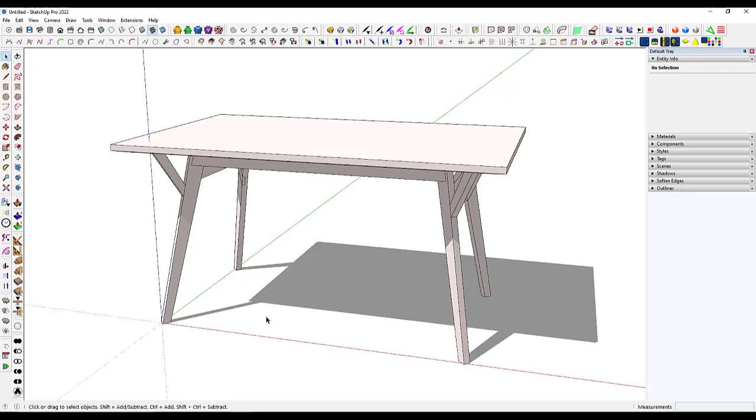The other day I was asked by a fellow woodworker on a woodworking forum about designing a table, something like this, with legs that are splayed and raked and angled knees. There were a few things I thought were interesting about the thought process of modeling this, so I thought I'd demonstrate.

Before we get into this, I want to point out I made a custom toolbar with the tape measure tool and the protractor. I'm going to use these tools sort of like you might use a pencil on a board. I put them out here instead of the ones on the far left, since I'll be in and out of those tools as I go, and you can see which tool I'm picking.

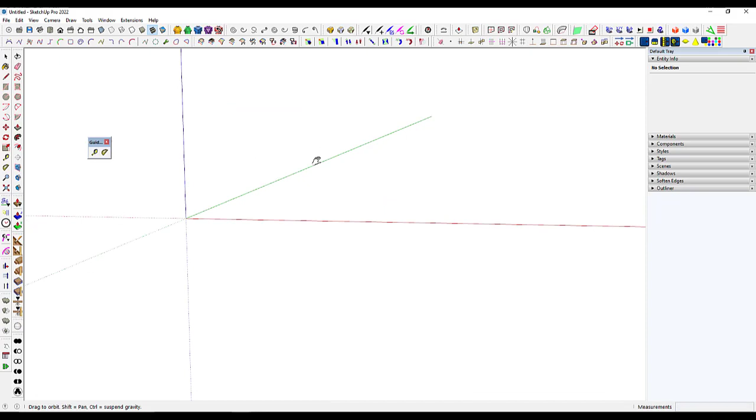The other thing I'm going to do is draw a rectangle, making it vertical. I'm just going to use this as my canvas to put my guidelines on, so I can keep them all in plane and it's a little easier to work that way.

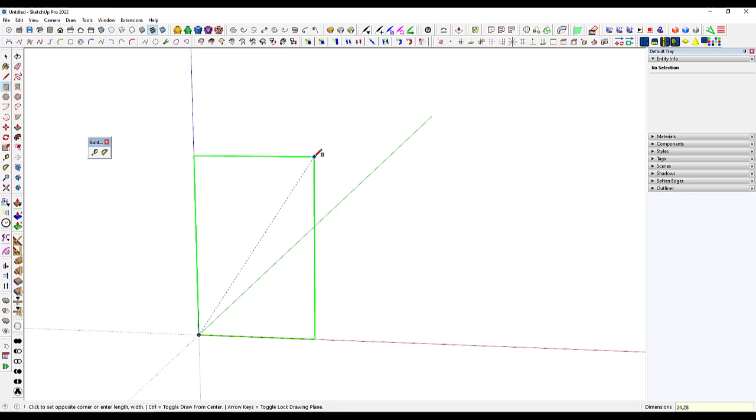I'm going to look at the dimensions. The narrow one comes first, so I'll make that 24 - the exact dimension isn't terribly important. The other one, I want the top of my leg to be at 28 inches off the floor, so I'll make that 28. Now I've got that rectangle.

I'm going to start. The reason I'm using guidelines and the protractor tool is these are not going to affect the geometry - they give me guides to work from and help me see what's going on, and then I can delete them when I'm finished.

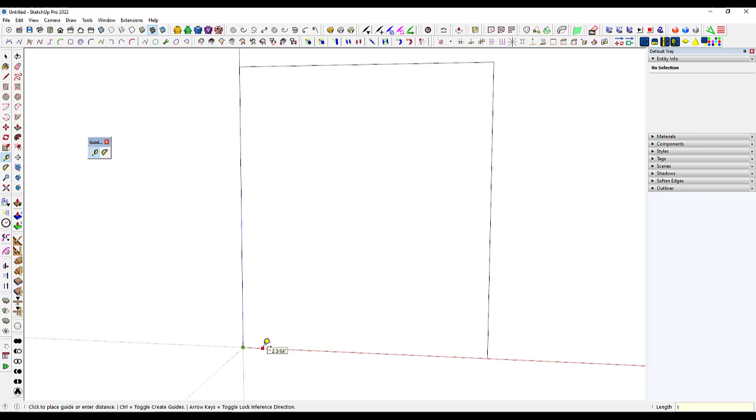So I'm going to start by defining the width of the foot here, and I'll just make that 1.25 inches. Some of this I'm kind of making up - as I said, I don't think this is the most perfect design. It could probably use some refining, but hopefully you get the idea.

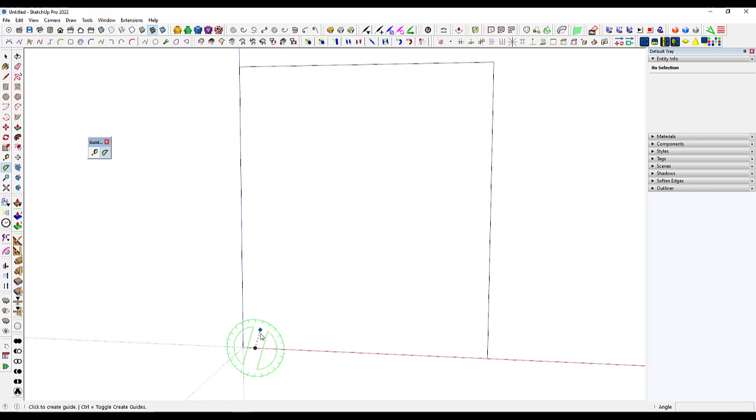From here, I'm going to put in this guideline at an angle - let's see, maybe 15... 12... I think we'll stick with 15. One of the nice things about a lot of the tools in SketchUp is if you're not totally convinced of the dimension or angle you put in, you can change it, until you select another tool.

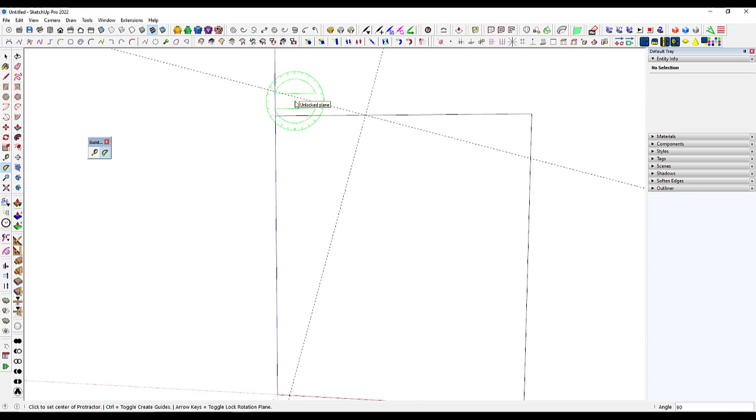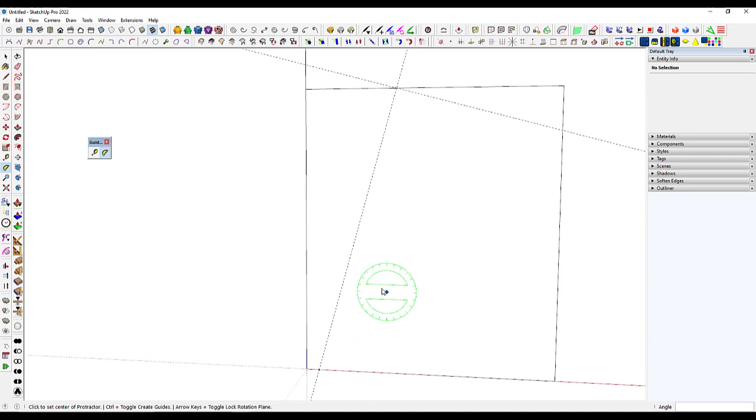Now I'm going to put in a guideline at 90 degrees. Part of my thought process here is also thinking about how I'm going to make the blanks for these pieces in the shop, and how I can cut them to final size with the tools I've got. So I'm thinking about this line, the inside edge of the leg, being my reference line. I've put this guideline in at 90 degrees so I can think about that as the end of my blank.

And of course the horizontal line here will be the mitered cut. Let's go up here somewhere - 2.5 maybe, yeah. So I just put a guideline there, and you'll get a guideline if you start at an intersection or some other point. In this case, I'm going to go from this point to that point, so then I get a guideline.

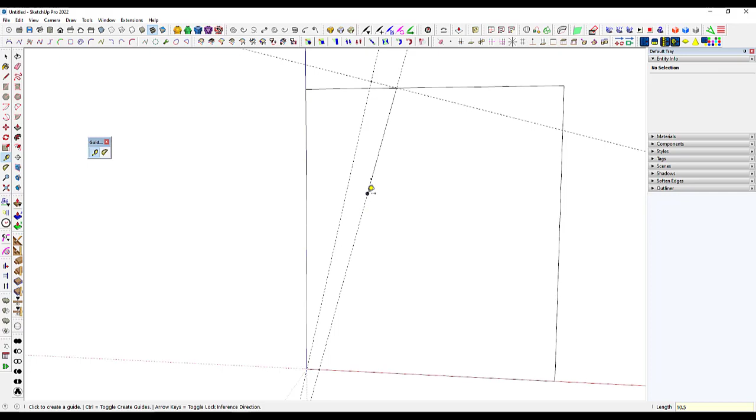So let's say that's going to be the leg. Then, since this inside edge is going to be my reference line, let's figure out where the knee is going to come out this side. Let's see, maybe 9 - maybe that'll be the top of the knee, and we'll come down here and try 10.5 maybe. Then I can go from this corner to that corner, and I've got the outside of my knee.

And go to 90 degrees again, just like before, and I don't know, let's say 1.5 inches.

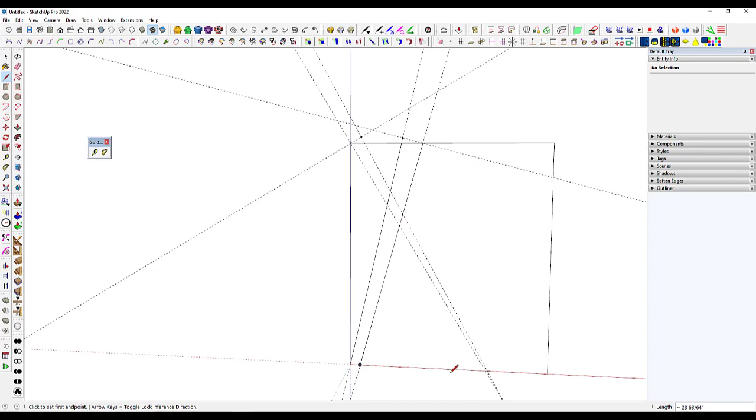All right, so we can kind of see a leg and a knee, or a brace, whatever you want to call that. We'll call that good for this, and I'm going to use the line tool and just trace the guidelines.

And then I don't need these edges or those, so those can be deleted. I've got my guidelines all laid out on the plane, and what I'm going to do is build my leg so it's straddling the red axis.

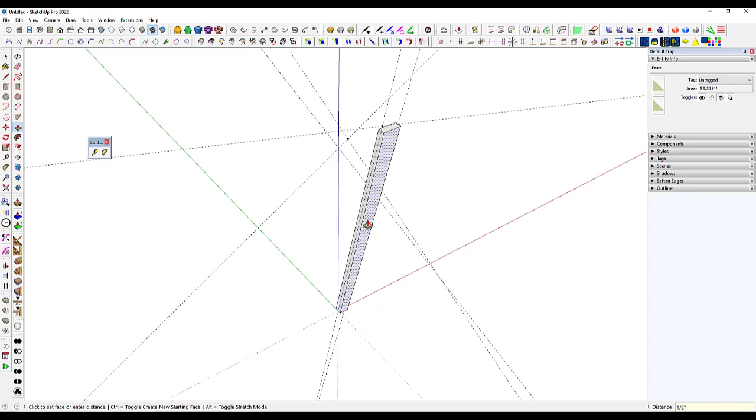So I'm going to push it this way half an inch and this way half an inch to make it one inch thick. One thing I should have done, it's no big deal to do now, but I should have put in a guideline at 90 degrees to that face, or that guideline that runs up my reference face.

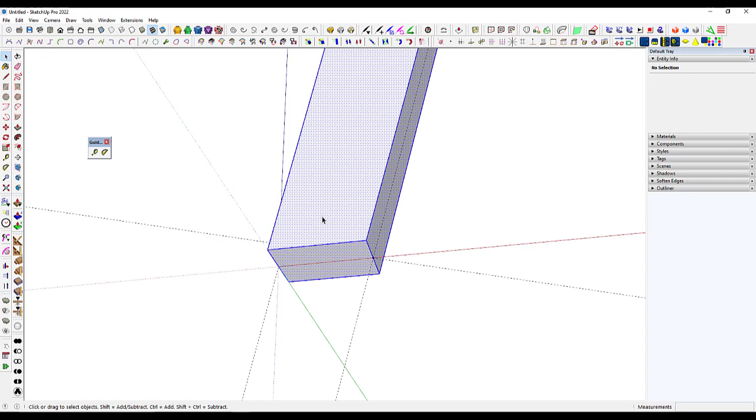I'm going to triple click on the leg geometry with the select tool, G to create the component, we'll call it leg. Whoops, and then I should have set the axes - I didn't, so we'll just change them. The reason I'm changing the axes is to make the component bounding box fit tightly around the leg, at least as tightly as it can.

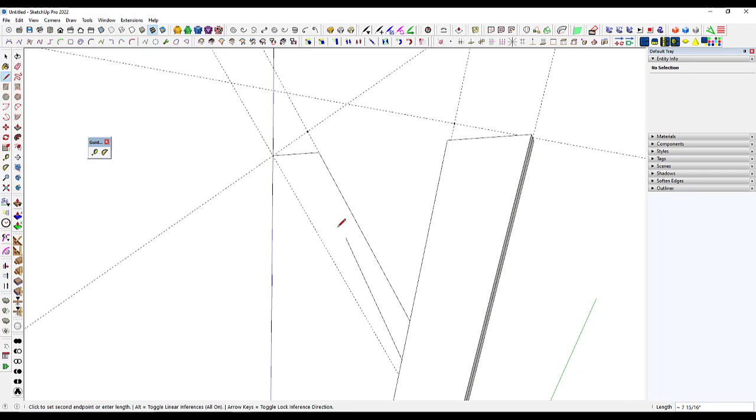All right, now we can do the knee part. I'm going to go in the red direction from this intersection, so that's in the same plane as the top of the leg. I'll draw this down here and here, connect the corners, pull that out, or push it and then pull it.

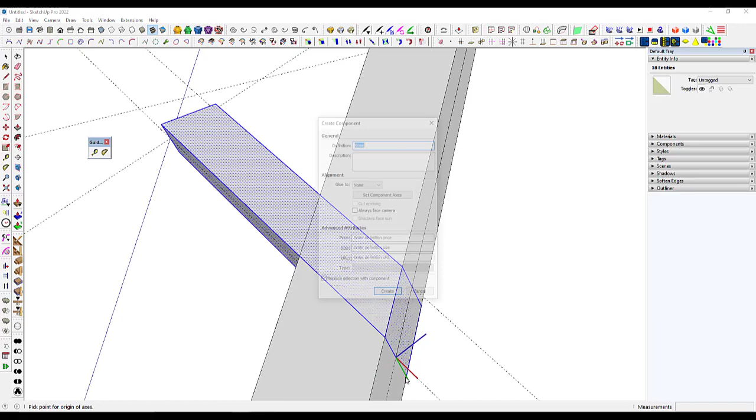This time I'm going to use the outside of the knee as my reference line, and I've already got a guideline where I need it to be for the axis I want to set. So we'll call this knee, and this time I'm going to choose set component axes, do this and that, and enter - now you can see I've got that set.

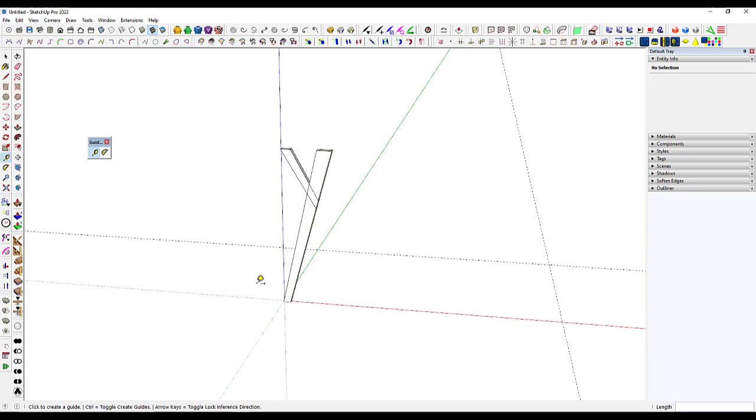All right, so now I'm finished with these guidelines, and I've got a keyboard shortcut set up for delete guides, but you can do that from the edit menu. Actually, before I do that step, let's set out, I don't know, let's say 48 inches, and maybe 28 this way. This is just kind of by eyeball, so these dimensions can easily be changed, but now I'm going to rotate the leg.

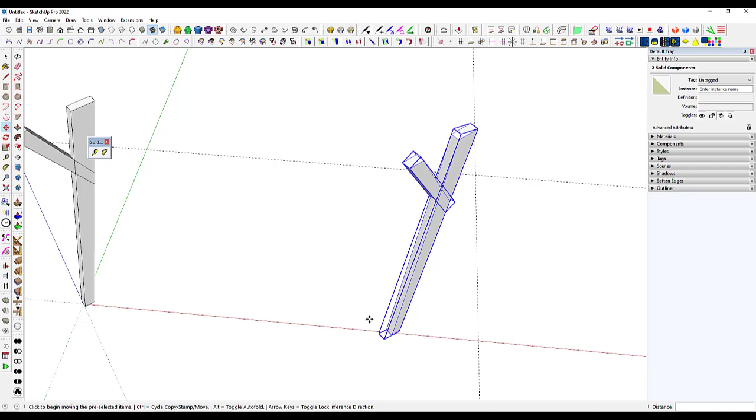Actually, let's only go to 45 degrees - there you go, could have typed that. And then I'm going to use move copy. Since I am moving this in the red direction, the two components, I'm going to use flip along the red direction, and I have a keyboard shortcut set up for that. We'll stick that there.

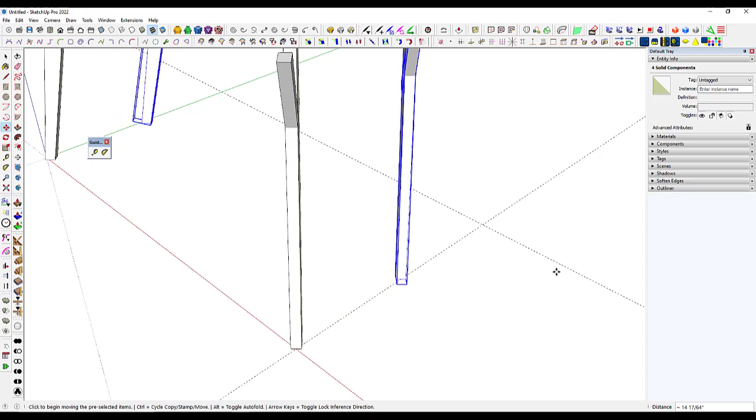And we'll select these two, and we will copy them back, and we'll flip those, and stick that there. All right.

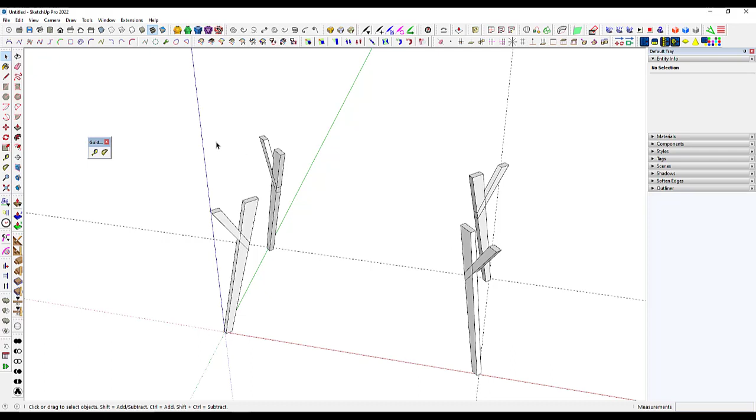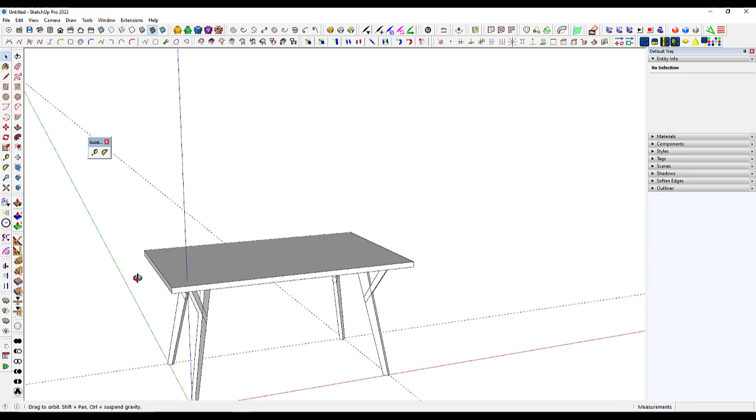I would use guidelines to model the aprons - I won't do that here, but we could go along here real quickly and just put on a top. The way I'm going to do that is use what I've already modeled. Let's bring that up, I don't know, 1.25 inches maybe, and maybe we'll pull that out 4 inches. Double click on each of the edges, and we could go ahead and make that a top component.

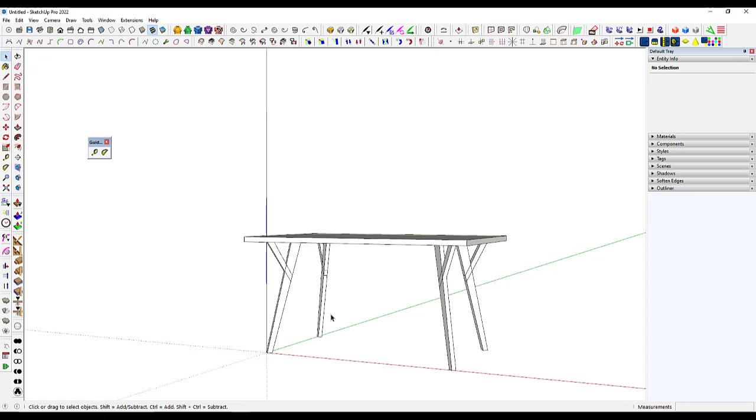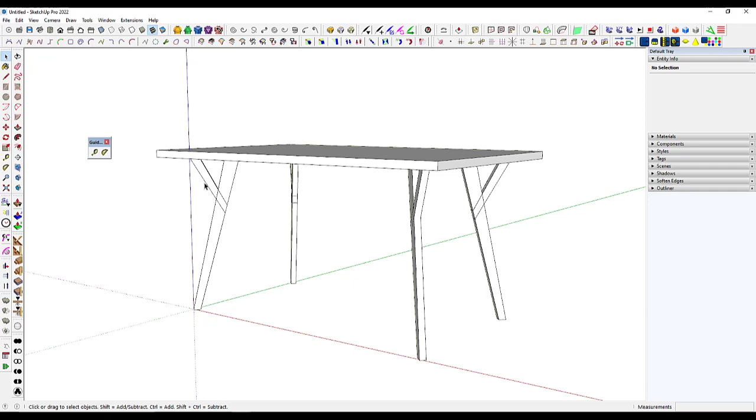Hopefully you sort of get the idea here with using the guidelines - very useful. Again, you're not committing to any geometry or anything. The guidelines don't affect your model as far as the way the geometry works. I think of it again as the pencil lines on boards, or chalk lines - maybe something that you're going to get rid of as soon as they've served their purpose.

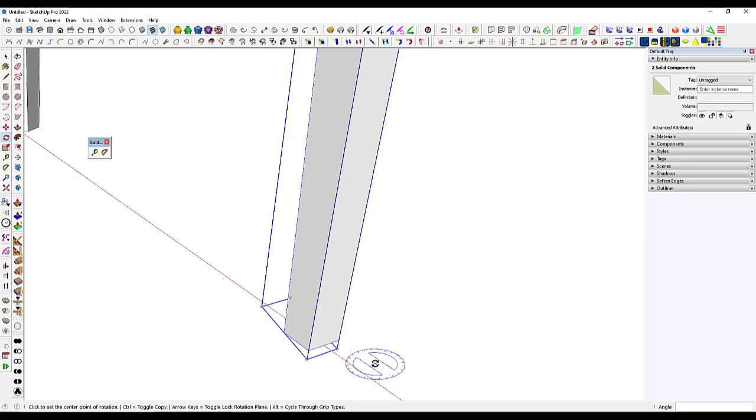Now I was going to do another thing here real quick. I'm just going to lay this down and kind of talk a little bit about that thought process of the way I drew this. What I'm thinking is, now I can set my fence on my sled. If I assemble these, I can set the fence on the table saw sled, cut these off in one go. So by designing things in place like that, I can use that thought process of how I would do it in the shop to guide me, and the way I'm modeling it in SketchUp to guide me in the shop. So it's kind of a two-way street as far as that goes.